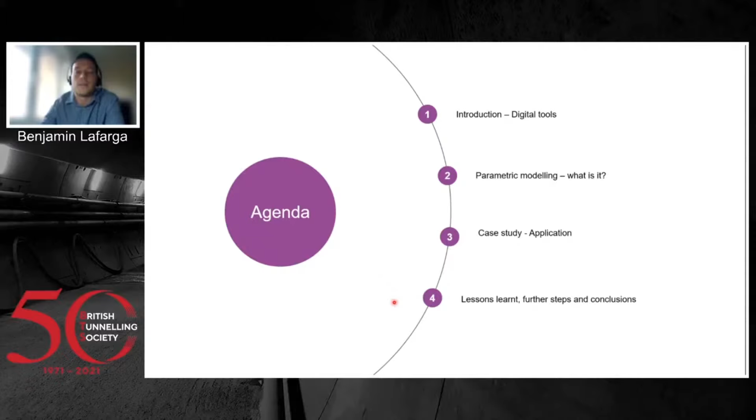There is a clear agreement within the sector which states that the efficiency in the way we deliver projects should improve. To face that challenge, Mott MacDonald launched the campaign Go Digital, where digital tools play an important role.

I have been involved in the development of a new design concept, taking into account these three main goals. First, we seek to speed up the design process so that any change can be quickly implemented. Also, a way to reduce the unproductive and abortive work associated with this iterative design. This is sometimes frustrating and something to be avoided, so actually we can make the most of our time.

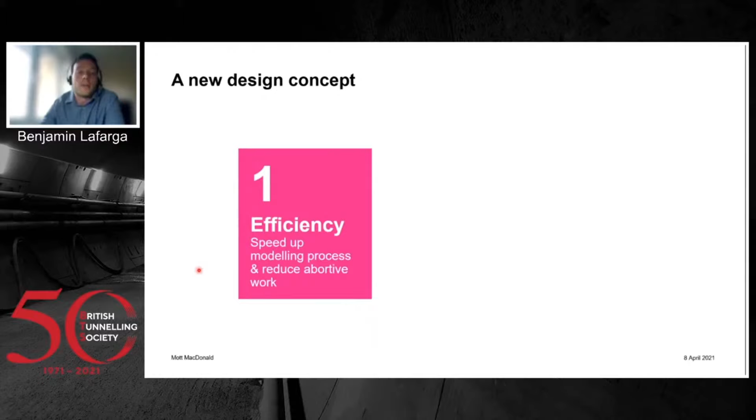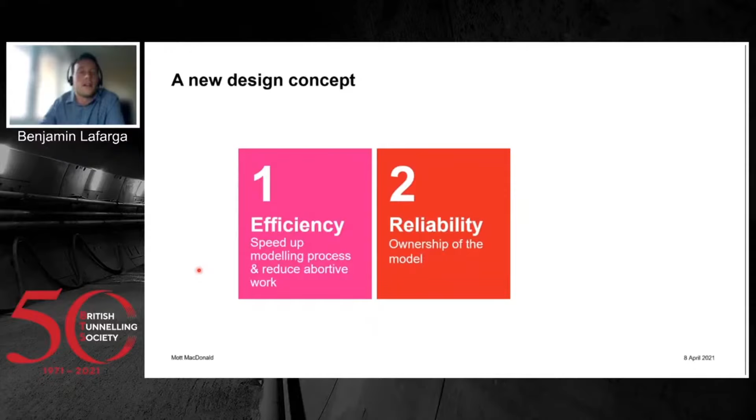We wanted to keep the design in the engineering hands, owning the model, in order to increase the reliability and the quality of the final product. And finally, we want to create an auditable and trackable single source of truth, which I will explain later.

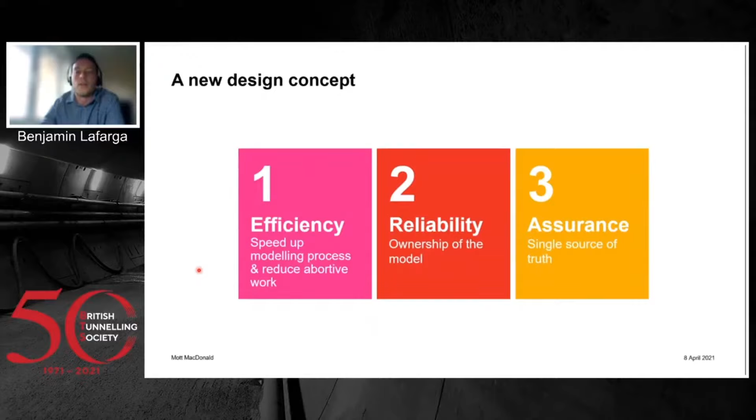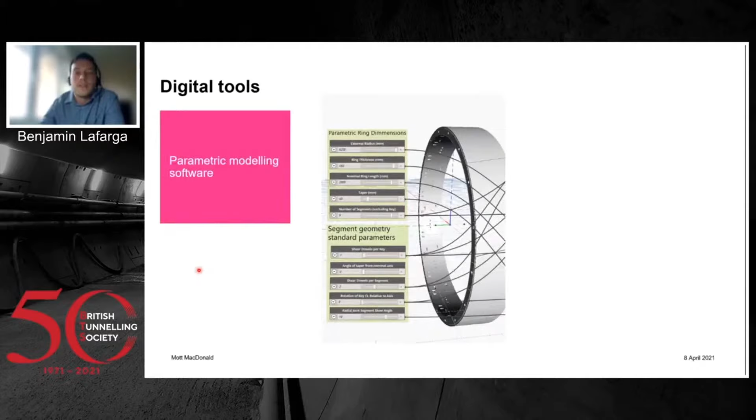I have been involved in the research of the appropriate digital tools available in the market. Parametric modeling, which is used, for example, in architecture, and mechanical design software, which is used in the manufacturing industry, were considered to have potential to be used in tunneling design. Software such as Dynamo, Generative Components, Grasshopper, or Inventor were explored.

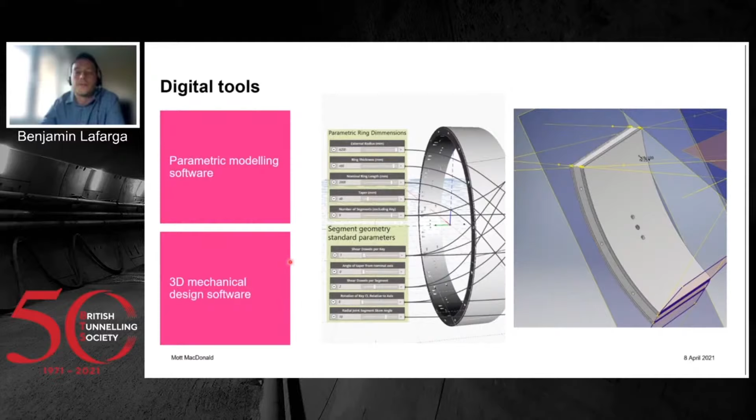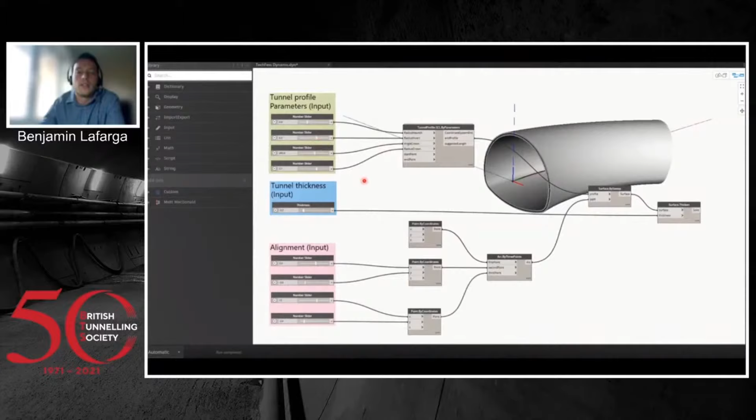With this short video, I want to show you the principles of parametric modeling. By means of a series of input parameters, we define the variables of the problem, and with the algorithm, the rules. With this, we can quickly modify the geometry by varying the parameters. So in this example, we can see how we can make the tunnel larger, thicker, or change the alignment.

Parametric modeling is not a new concept, but the real challenge was to apply these principles and an automated design concept into a fee-earning project of this magnitude. There were several challenges in this project, such as interfaces with other parties or unknown data. To tackle this and to increase the efficiency in our design, parametric modeling came up to be a good solution to solve those issues.

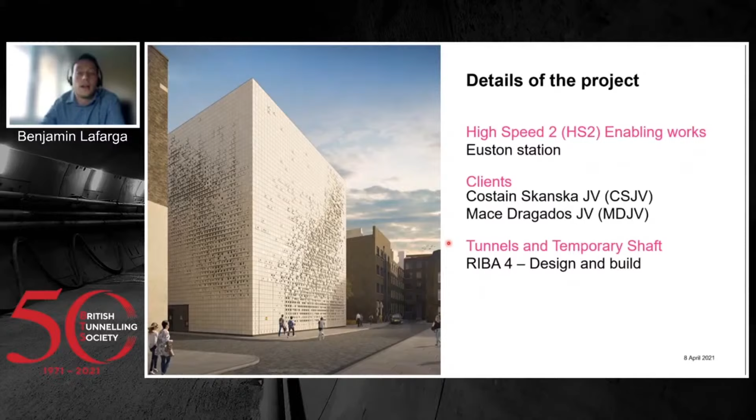After our previous studies, we were confident that we could apply this to the High Speed 2 enabling works in the Euston station. The characteristics and size of the project and the engagement of the client made this option ideal. This is a detailed design project, which is currently in process for final approval from HS2, and the construction is expected to start this year.

A quick overview of the project. There is an existing head house within the footprint of the new Euston station for HS2. This existing head house, which belongs to London Underground, needs to be relocated outside the footprint. And this new head house needs to be connected by means of a series of tunnels to the existing underground infrastructure.

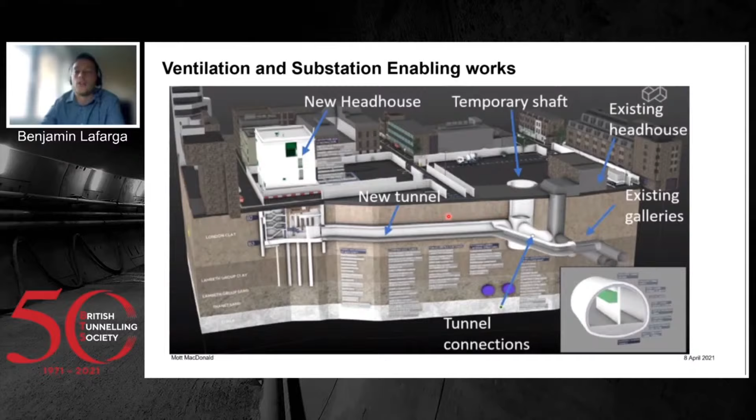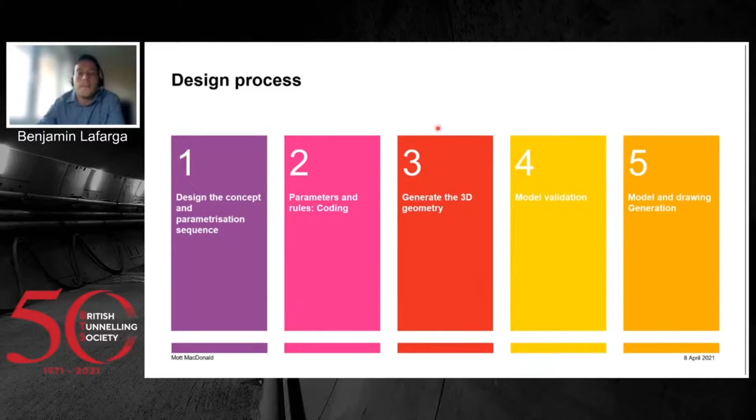Bear also in mind that in a further stage, the base slab of the HS2 Euston station will be very close to the crown of these new tunnels. In this project, I was responsible for developing and implementing the design methodology based on fully automated geometry modeling. I have summarized the process in these 5 steps: design the concept and parameterization sequence, coding, generating the 3D model, model validation, and model and drawing generation.

I really like this slide, because even when designing a fully automated modeling system, defining the engineering concept remains absolutely the same. Then we need to define how the structure is going to build up in a logical manner, similar to what you would do modeling a 3D geometry manually. The difference here is that instead of fixed dimensions, the parameters that define the geometry are variables.

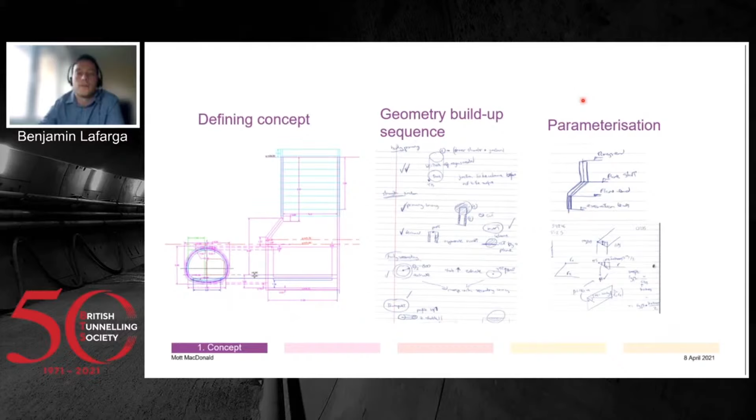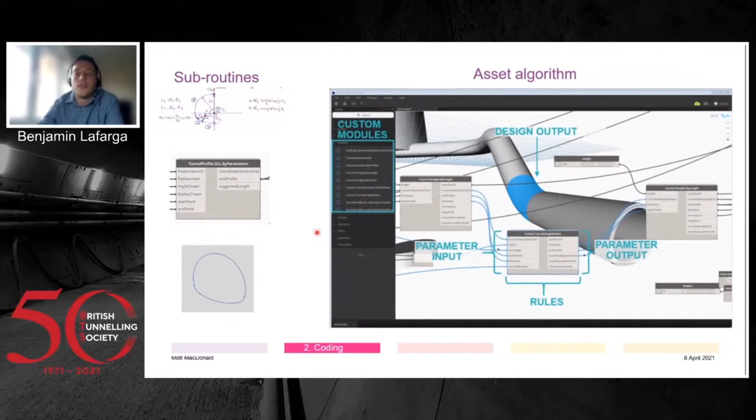The next step is to generate the subroutines, which will be repeatedly used in our coding. On the left, for example, you can see the subroutine that gives as an output the 3-curve tunnel profile, taking as an input 6 parameters: radius, angle, and reference points. To code the assets in this project, I used the commercial software Autodesk Dynamo. This is an intuitive and user-friendly software which only requires basic programming skills.

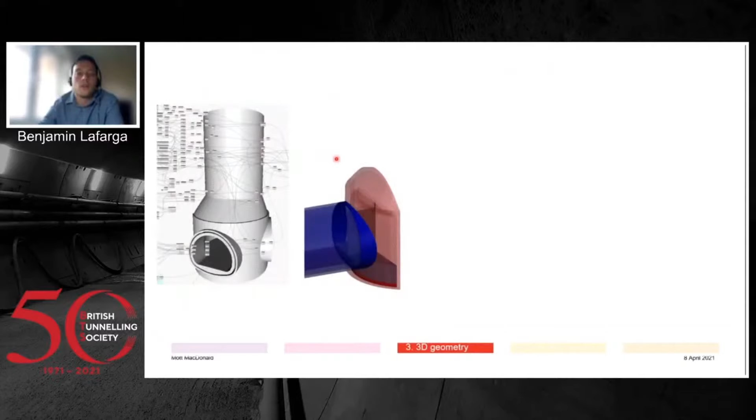Once the asset is coded, the geometry can be transferred to the building information modeling environment, as shown in this case for the temporary shaft, the tunnel connection and the adits. However, before importing it, I developed a full validation process in order to first validate the script that has been coded, and second, to validate the geometry itself coming out from the script.

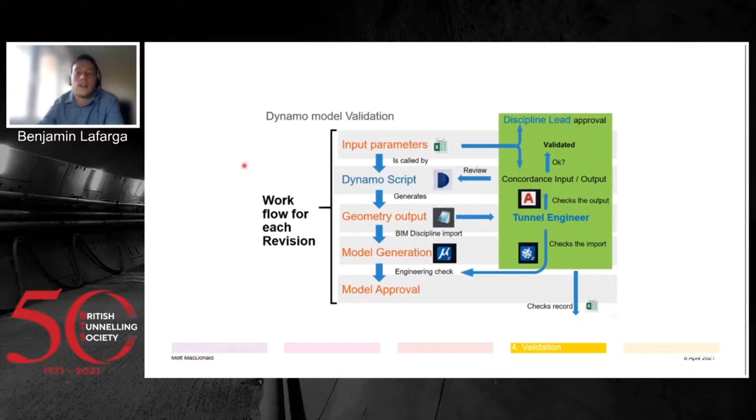The input parameters are logged in a database, and this database is called automatically by the script. This input database was our single source of truth. With this system, I ensured that the whole model was always using the most updated data. For this specific project, for example, we've been using over 120 parameters, which were used within the 3 scripts that define the whole set of assets that we were designing.

Finally, once the script and the geometry have been validated, the geometry could be imported into the BIM environment, and this is the base to produce the 2D drawings. As a BIM manager, I was in charge of the drawing production, where over 60 detailed design drawings were submitted for this project, without counting the RC drawings.

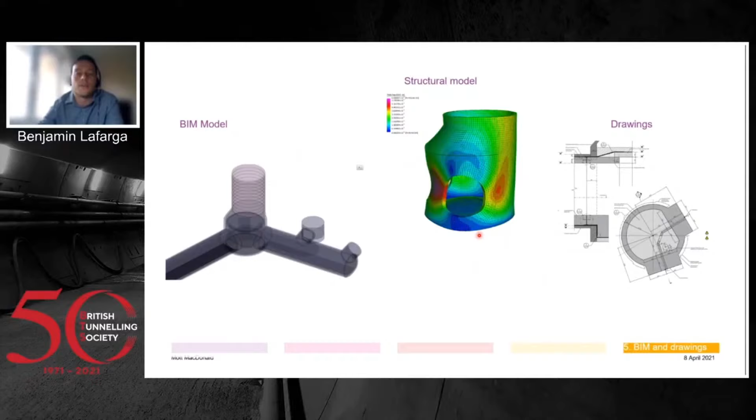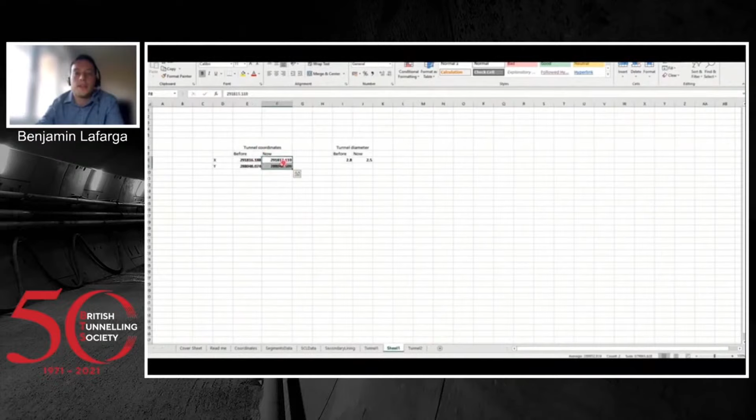We also used parametric modeling to generate the geometry for the structural and numerical calculations. With this short demo, I want to show a real script and how it works. As an example, let's imagine that there has been a late design decision and we need to modify the shaft junction. By changing the required parameters in the input database, you can see here, we're changing the alignment and the radius of the tunnel. We can obtain our new geometry within seconds, as you can see here.

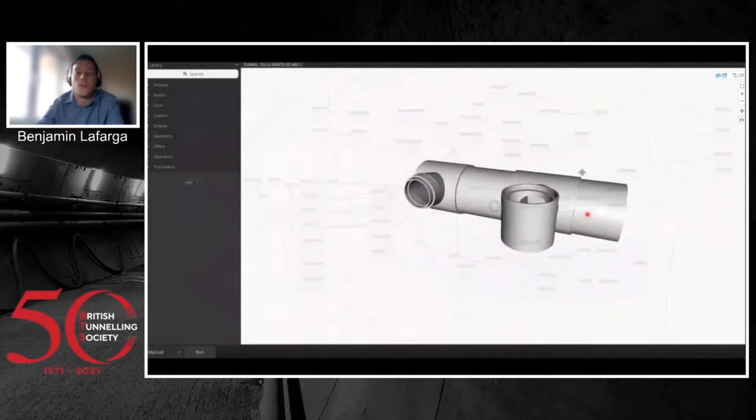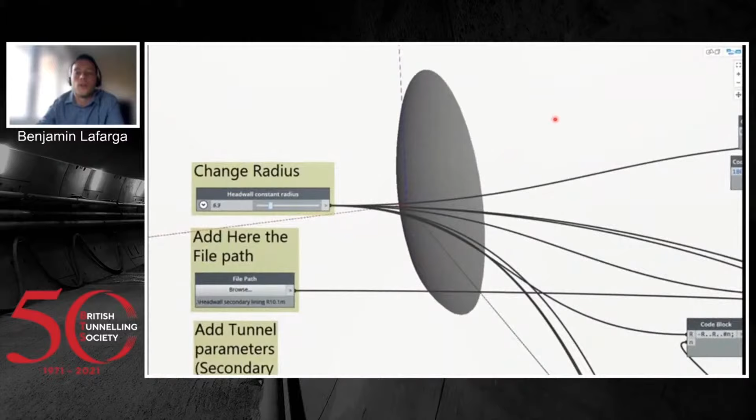Here I'm showing how, thanks to parametric modeling, we can ensure our structural model is aligned with the updated geometry. This provides consistency to the design process. Finally, I want to show the geometry exported in the BIM software and how flexible and convenient it is to explore the different geometries in this dome-shaped head wall.

I would like to speak now about several specific examples of this project which made parametric modeling extremely useful. At the beginning of this project, we suggested a number of significant changes which would add value to the design and the future construction. So here you can see on the left the previous concept, and on the right our proposal. Parametric modeling gave us the agility needed to explore and adapt the new solution, increasing the quality of the final solution. Since we spent less time dealing with the geometry and instructing the CAD technician, we had more time to invest in other engineering issues.

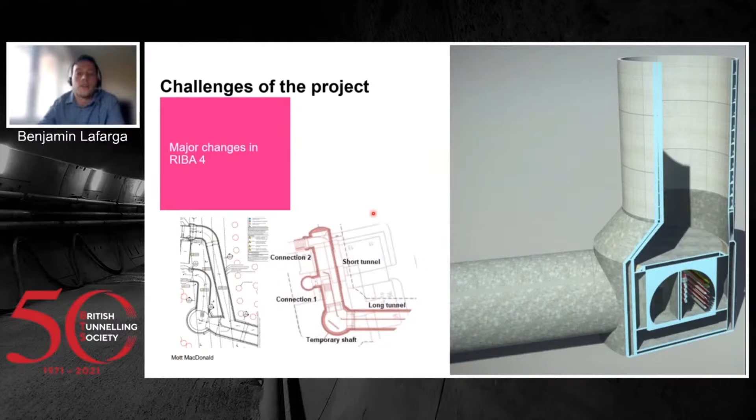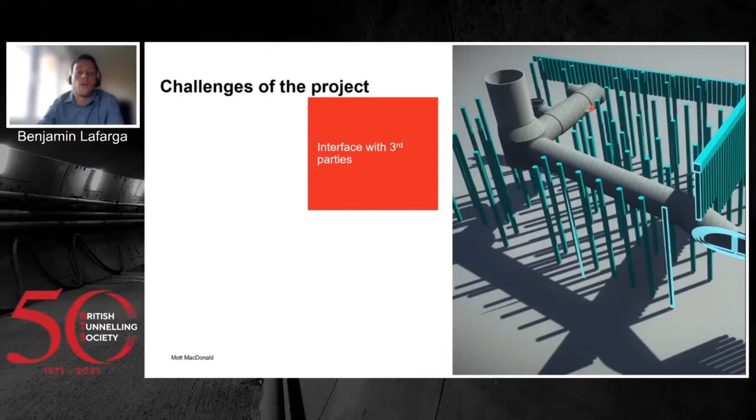The interface with third parties was a challenge. All the parties were involved, and this was a highly constrained and condensed area. And more importantly, the other packages and the interfaces were in other stages of development, so change could happen at a very late stage. As an example, here I show you our tunnels and the temporary shaft. This is within an array of piles, and above the piles will be placed the base slab of the HS2 Euston station. An example of this was that the loads coming from the base slab changed at a very late stage of our detailed design, which led to certain modifications in the model. Thanks to parametric modeling, we were able to update our geometry pretty quickly.

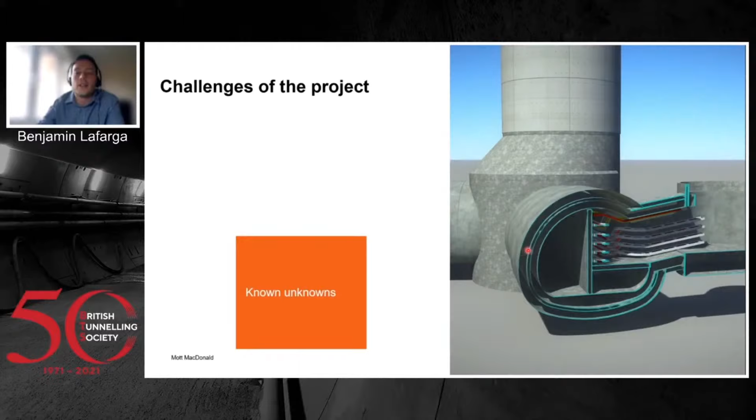And also, we were able to deal with what we call known unknowns. The main purpose of this project was to connect the new tunnel here with the existing London Underground infrastructure right here. However, by the time we were designing, the exact dimension and location of the existing assets was not confirmed because we needed a survey, and that survey was not aligned with our design program. So with parametric modeling, we were able to code our design with unconfirmed input data, leaving the existing assets parameters as work in progress. This provided flexibility and it saved weeks in the design program as well.

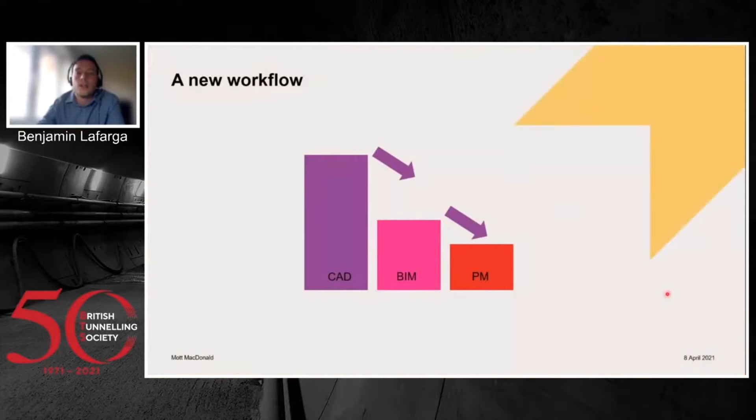Well, the feedback we received internally from our CAD team is the best proof of the success of parametric modeling in this project. Despite a higher spend in engineering, since now the engineer is the one who owns the geometrical model, we achieved considerable savings in CAD. This is one step further than what we already achieved with BIM technology.

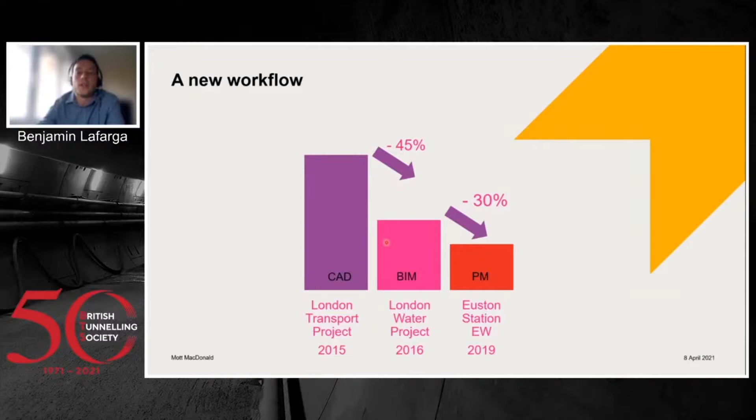The design process using parametric modeling is just the seed for getting a more efficient design. For example, adding optimization criteria, such as space proofing requirements, can target a reduction in the concrete or in the excavation volume. Using our programming skills, we can connect different software to ensure consistency in the design, or we can also generate reports or outputs in a more automated manner.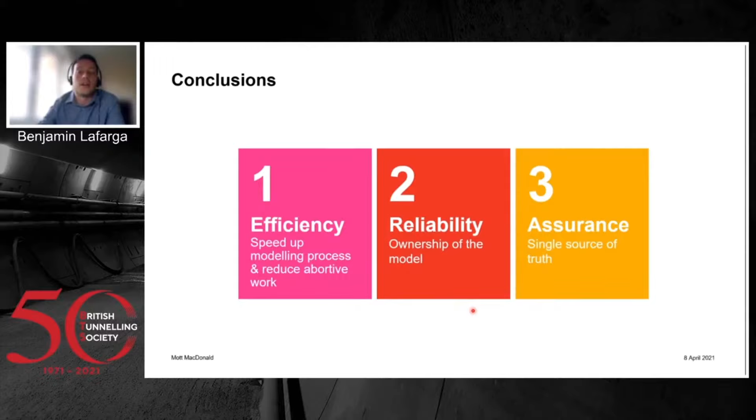Hello and welcome to my presentation for the British Tunnelling Society Harding Prize 2021. I'm going to talk about the design and construction of pile load interception transfer structures at 6 to 8 Princes Street for Bank Station capacity upgrade.

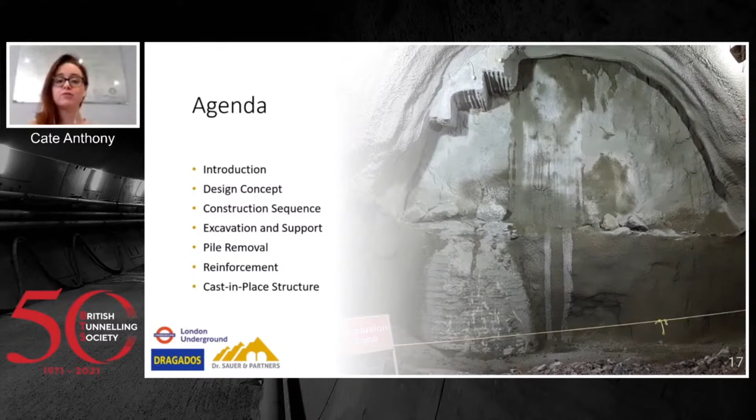So for the presentation, I'm going to give a little introduction both of myself and of the project. Then I'll go through the design concept, the construction sequence, the excavation and support ahead of the installation of the transfer structures, how the piles were removed, and then the reinforcement and the cast in place final transfer structure.

So a little bit about me. I started my engineering career at Cardiff University and I did an MEng there, and while I was there I worked with BAM Nuttall, working on projects such as Olympic Park and Tottenham Court Road station upgrade, which was my first tunnelling project. After about a year there, I identified that actually tunnelling was my favourite part of engineering, and I went to Warwick University and did the MSc in tunnelling and underground space.

I graduated and joined Dr. Sauer and Partners in 2013 and have been with them ever since, working on major tunnelling projects such as Farringdon Crossrail, Bond Street Station upgrade, Bank Station capacity upgrade, which I'm going to talk about today, and there I worked for about 4 years both in the design team and in the construction team, and currently I'm working on HS2 Euston Station.

Bank Station capacity upgrade is a £550 million project with the aim of matching projected ridership for Bank Station in the coming years. It's one of the busiest stations on the network, and actually across Bank and Monument joins together 5 lines on the underground. The station upgrade aims to provide 3 new escalators, step-free access to both the Northern Line and the Central Line, and a new southbound running tunnel, which will allow the existing running tunnel, platform tunnel, to be used as a concourse tunnel and free up a lot of space at Northern Line level.

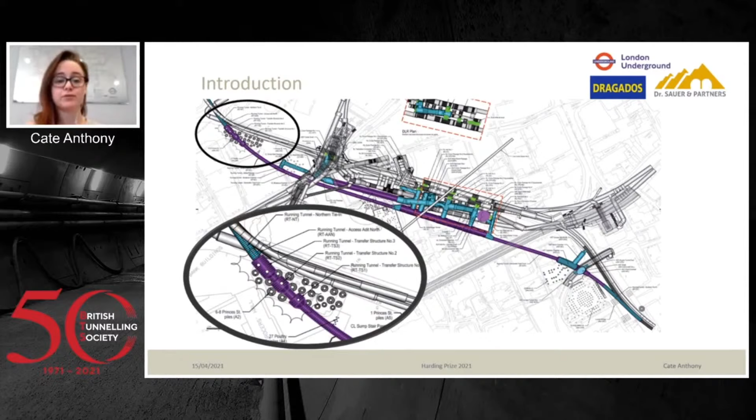6 to 8 Princes Street, the building that we're clashing with, is an 8-storey building opposite the Bank of England, and it's founded on large diameter under-reamed piles. It's currently used for banking, and it was occupied throughout the duration of the pile transfer structure and the Bank Station capacity upgrade project. The locations of the piles and its foundation and the pile loads are provided by the building owner, the Worshipful Company of Grocers, to the project, and from early on in the project, London Underground worked very closely with the building owner to ensure that they could deliver everything that the building owner needed and that the project needed, and that we could adhere to the legal agreement under the Transport and Works Act order.

The initial concept for supporting these building piles actually involved a gallery construction above the proposed running tunnel and the installation of active jacks to jack the piles up. However, as the design developed, it was found that this was not a requirement, it wasn't needed, and actually it was much safer and much more sustainable to provide a structure that could be completely separated and allow the building and the London Underground tunnel itself to operate completely independent of each other.

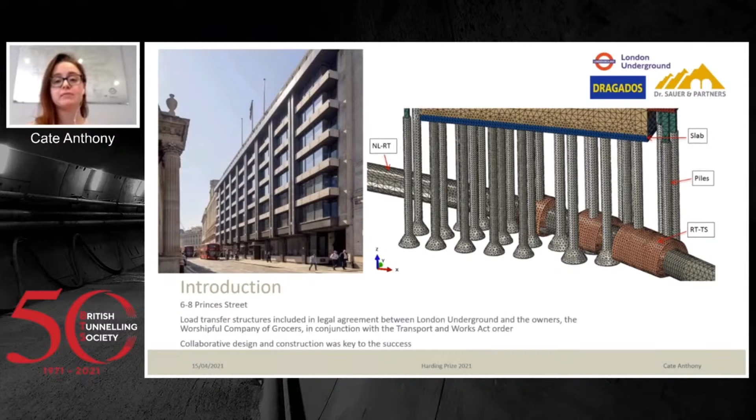So the design concept and the final alignment required the complete removal of the underream of 4 piles, and that was pile 14, pile 4, pile 24 and 25 at the back. We also identified during detail design that there was a possible clash and possible partial removal requirement for piles 3, 15 and 23.

For the full load transfer structure, the structure was made up of 3 key elements, and this was an SCL primary lining, which provided access for the transfer structure construction and supported the ground load externally. Then a concrete arch would be constructed. This would transfer the pile loads along its neutral axis and into the ground. And finally, the tunnel lining would be provided to give London Underground a completely separate structure.

In the early detailed design, I carried out empirical calculations to assess what size the initial SCL needed to be and the initial structural sizing for the concrete arch itself. Based on this, the geometry of the transfer structure that you can see was developed.

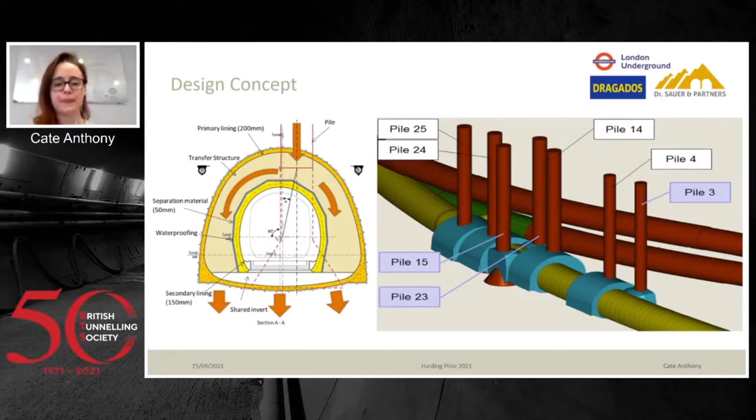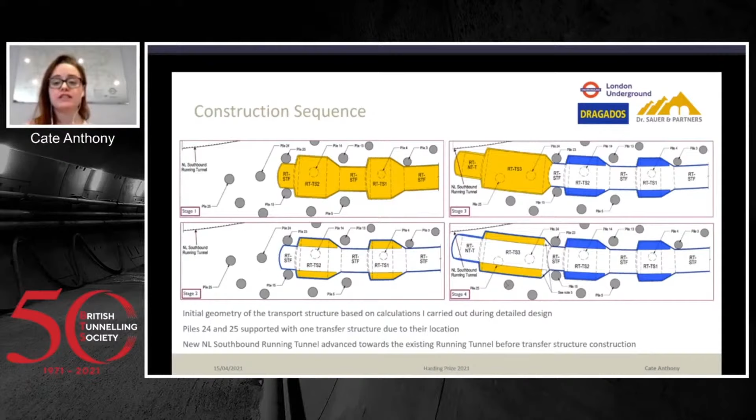So while I was carrying out my detailed design and while other members of the team were running the finite element calculations, a building damage assessment was being carried out for the superstructure at 6 to 8 Princes Street. When we understood more about the design concept and the building requirements themselves, it was actually identified that the transfer structure was required for future capacity only. This would enable any developers in the future to have a greater capacity of foundation should they wish to rebuild 6 to 8 Princes Street.

So with that knowledge in mind, knowing that we only needed to provide capacity for future structure, the project decided to construct the pile intersection structures, the load transfer structures, as part of the normal excavation and support sequence. And we grouped these into 2 groups of 2. So the first structures were for pile 4 and 14, and the SCL lining was excavated and the piles were removed as we went through.

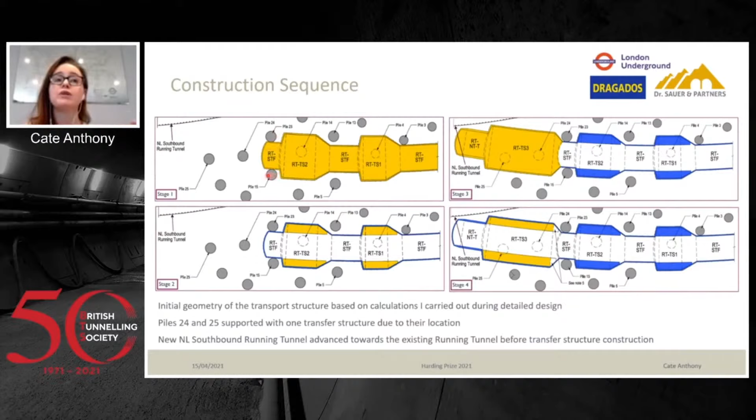We decided to continue all the way to piles 23 and 15 because we knew that these were extremely close to the running tunnel alignment, and that there was a significant risk that we might have to provide additional structure to partially support piles 15 and 23. Luckily, we didn't need to do that, but the underream of these piles did encroach into the running tunnel, and I can talk about that a little bit later.

Once the primary lining was in and we knew exactly what the underground situation looked like for most of these piles, we installed the pile transfer structures for piles 4 and 14, and then finally continued on towards the northern line southbound running tunnel. You can see the existing tunnel here to the top of the picture. We got extremely close, and the running tunnel was operational throughout the duration of the construction of these transfer structures.

Finally, the third transfer structure was installed for piles 24 and 25. We decided to install one transfer structure for this location because the piles were so close to each other, and we were quite constrained by piles 23 and 15 behind. You'll also see that the transition is much steeper here than it was for the previous 2 piles, and this is because we wanted to make sure that we avoided clashing with these piles as much as possible, and we minimised the impact on the building foundation where we could.